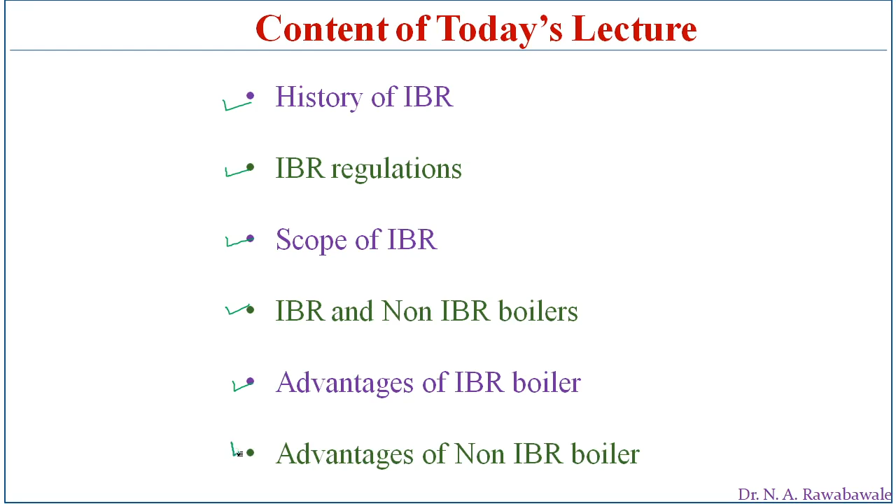So initially there was a boiler explosion that occurred in Calcutta in the year 1863, and that became the origin for IBR, the Indian Boiler Regulations. That created the necessity of boiler regulation, which compelled the governments in existence to develop a law regarding the boilers operating in industries.

The bill was passed by the Bengal Council in the year 1864 regarding inspection and installation of steam boilers in and around the city of Calcutta. The country decided to form a uniform set of regulations. Afterwards, the British government, which was ruling India, thought it necessary to form a set of regulations uniformly implemented throughout the nation, and they enacted the Indian Boiler Act 1923.

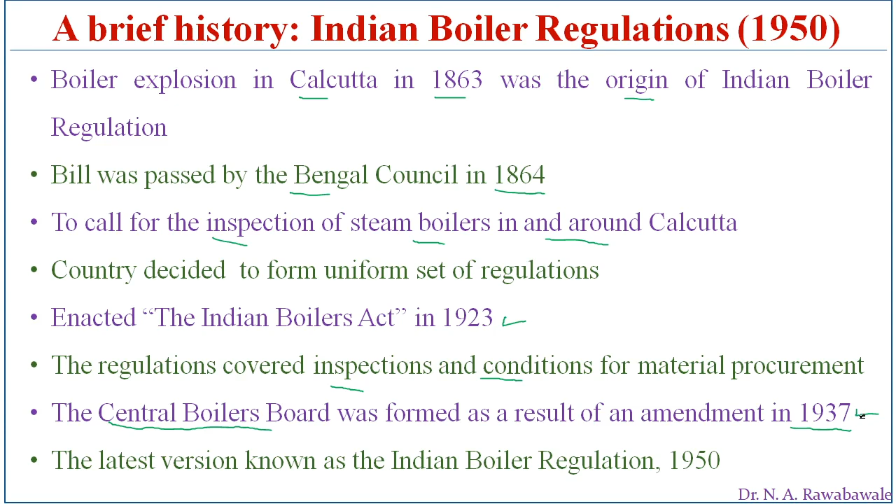So why is IBR, the Indian Boiler Regulation Act, necessary? To monitor manufacturing of boilers, as the boiler is subjected to very high pressure and temperature, and there is every chance that the boiler may explode if inferior quality material is used, if it is not maintained properly, or if its design is not proper. Then it may explode early and cause damage to property as well as the lives of people working around it. Therefore, it was necessary to monitor manufacturing of boilers.

Then selection of material is also one of the important factors responsible for explosion of a boiler. If the material used is of inferior quality, there is a chance of explosion. Therefore, it is necessary to monitor selection of material used for manufacturing of boilers.

At the same time, the design of the boiler, and not only the boiler but the components working at high pressure along with it, is also an important factor. If the design is poor, the boiler may not work properly and may cause damage or explode. Poorly designed components may not withstand high pressure and high temperature steam, and there is a chance of leakage or explosion.

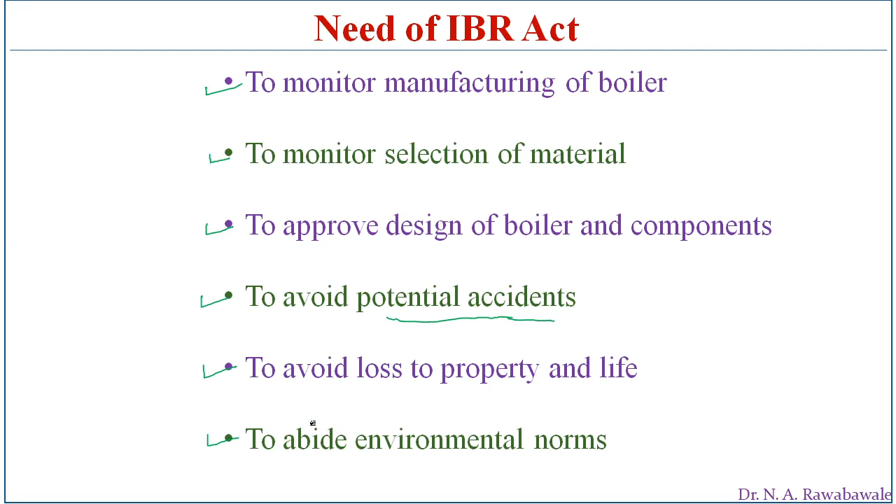IBR is also required to abide with environmental norms. So here the environmental norms: a boiler which is to be installed is going to create pollution and all. So properly designed boilers may produce less pollution, and for that also IBR was required.

IBR stands for Indian Boiler Regulations, or the Indian Boiler Act. It is the act enacted by the Government of India. The IBR Act governs manufacturing of boilers, installation of boilers, and operation of steam boilers.

So IBR is not type approval once a certain type of design is approved. For example, a boiler is designed and then it is approved once, so that can be continued without any alterations in the design. If there is an alteration, then a re-approval is required. So a minor alteration in the design of a boiler requires approval from IBR.

So it is a specific approval for each and every unit, meaning if we are using a boiler, manufacturing a boiler or installing a boiler, IBR has to approve each and every component such as the economizer, boiler valves, everything has to be approved. Each boiler, every valve, every trap, every pipe has to be approved by the IBR authorities.

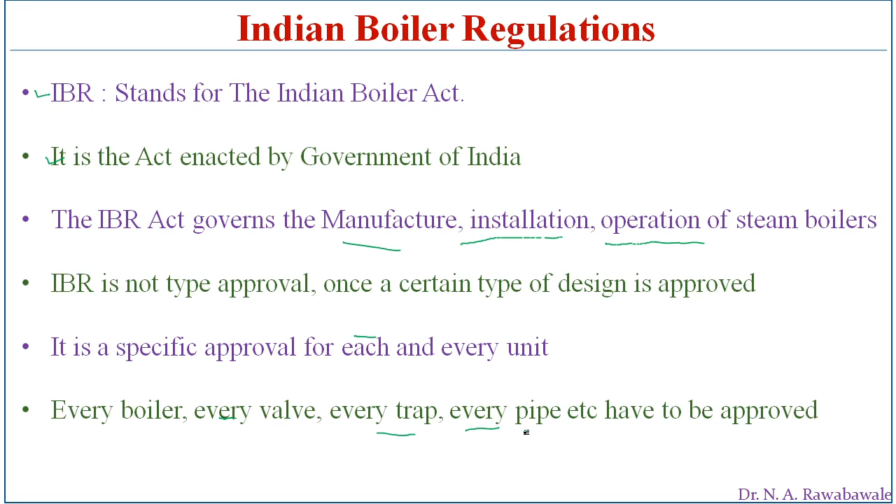So anything that is used without IBR approval is not valid, and there are actionable claims over such use of devices which are not approved by IBR. So the components which are working along with the boiler at high pressure and high temperature have to be approved by the proper authority.

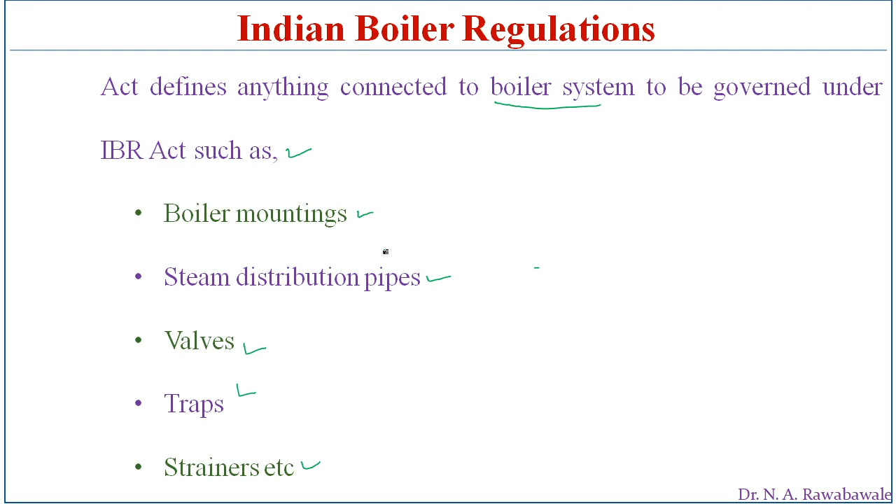So the Indian Boiler Regulation Act defines anything connected to the boiler system to be governed under the IBR Act, such as boiler mountings, steam distribution pipes, valves, traps, strainers. Boiler mountings and accessories have to be covered here, but not all accessories. Few of the accessories have to be covered.

IBR boiler means a closed vessel exceeding 25 liters capacity. It is used exclusively for generating steam under pressure. So the pressure which is generated is above 3.5 kg per centimeter square. If the pressure is above 3.5 kg per centimeter square, then that boiler is called an IBR boiler.

It includes boiler mountings and other fittings also. So an IBR boiler includes boiler mountings and other fittings such as valves and all, which are wholly or partly under pressure when steam is shut off. Even if steam generation is shut off, it has to withstand this pressure wholly or partly. Then that component is known as an IBR boiler.

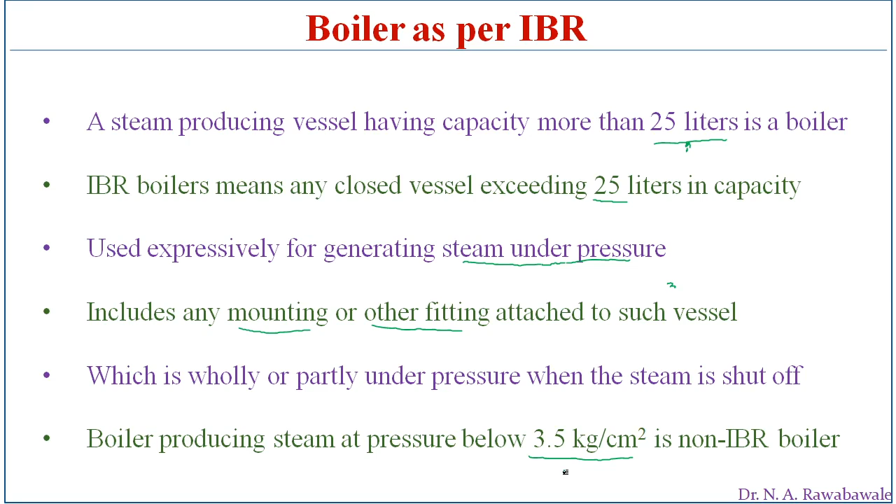The scope of IBR. What is covered under the IBR Act? IBR covers the design, fabrication, inspection, testing and certification of boilers, or any boiler part including feed piping, fittings or vessels attached. So this covers all the things which are in connection or working along with the boiler. The boiler part including feed pipe.

The water pipe which is supplying feed water to the boiler is known as feed piping. That piping is also considered under IBR because the feed water has to be supplied to the boiler at very high pressure, that is, at boiler pressure itself. Therefore that piping is also considered under IBR.

Fittings such as valves and all, vessel attachments, anything that is attached to the boiler shell, maybe a pressure gauge, that is also covered under IBR. Boiler components, any other components working along with the boiler or fitted over the boiler. Then steam piping, the pipe which is carrying steam starting from the steam stop valve to the final use of steam, that is also included in IBR.

Feed piping we have already discussed. Economizer is covered in this because the water which is supplied through the economizer enters into the boiler, which is at high pressure. That is, feed water is passed through the economizer in order to extract heat, and that feed water is to be supplied at very high pressure. Therefore the economizer is also covered under IBR.

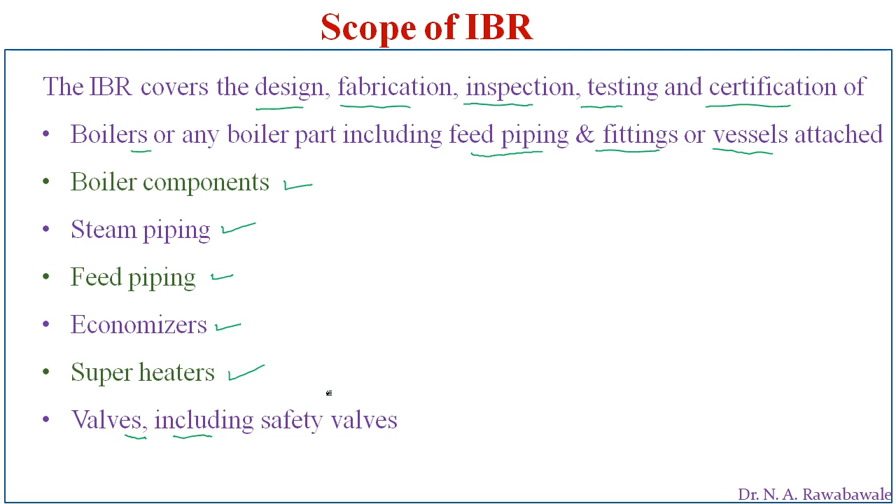Any mounting or fitting, or any external or internal part of the boiler which is subjected to pressure exceeding 3.5 kg per centimeter square gauge. This is a gauge pressure. If any component working along with the boiler is subjected to pressure more than 3.5 kg per centimeter square gauge, then that part is covered under IBR, for which proper certification through IBR authorities is required.

Steam receivers, separators, steam traps, accumulators, and similar vessels are covered. There can be heat exchangers, converters, evaporators, or similar vessels in which steam is generated. So anything where steam is generated is also covered under IBR. We cannot say that this is simply a heat exchanger, not a boiler, and not covered under IBR. If a heat exchanger is working at high pressure above 3.5 kg per centimeter square gauge pressure, that heat exchanger is also included in IBR.

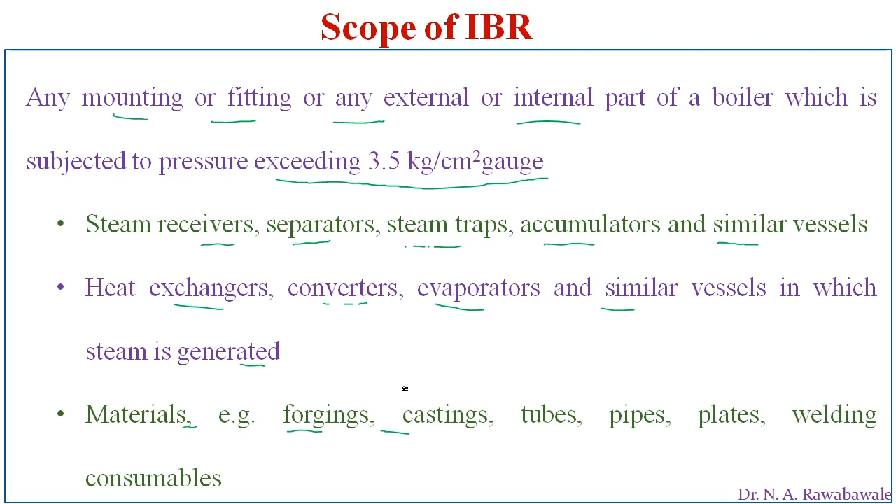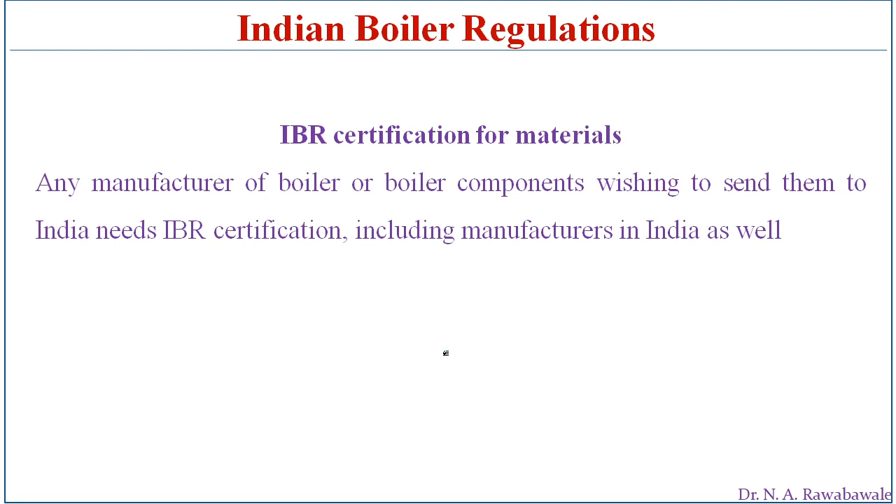Then materials: forgings, castings, tubes, pipes, plates, welding, and consumables which are used to manufacture the boiler are covered under IBR law. So what is IBR certification for material: any manufacturer who wants to manufacture a boiler or components of a boiler and wishes to send that material or components to India needs certification. Not only foreign manufacturers, it includes Indian manufacturers. So if any Indian manufacturer wants to manufacture boiler parts or a boiler, they also need to get IBR certification to manufacture such components and supply them into the market.

Inspecting authority: who has authority to inspect a boiler? Any agency recognized by the Central Boiler Board. The Central Boiler Board is established by the Government of India, and CBB recognizes a person or agency to do IBR inspection, and only that agency can do inspection or certification of a boiler. So only an agency recognized by CBB as IBR certifying authority has the authority to issue the certificate. Inspecting authorities are required to sign off on many parts of IBR certification processes.

These inspecting or certifying authorities are appointed or chosen by CBB, and they have to sign off on many parts of the IBR certification process. So they have to do inspection and then sign such certificates. They are heavily scrutinized by the Indian government. At the time of appointing such authorities, the Government of India verifies their qualification, and after examining them, appoints such authorities to inspect the boiler. Inspecting authorities are given certificates indicating their approval. Once an authority is approved, the Government of India issues them a certificate that such person or agency is authorized to certify boilers.

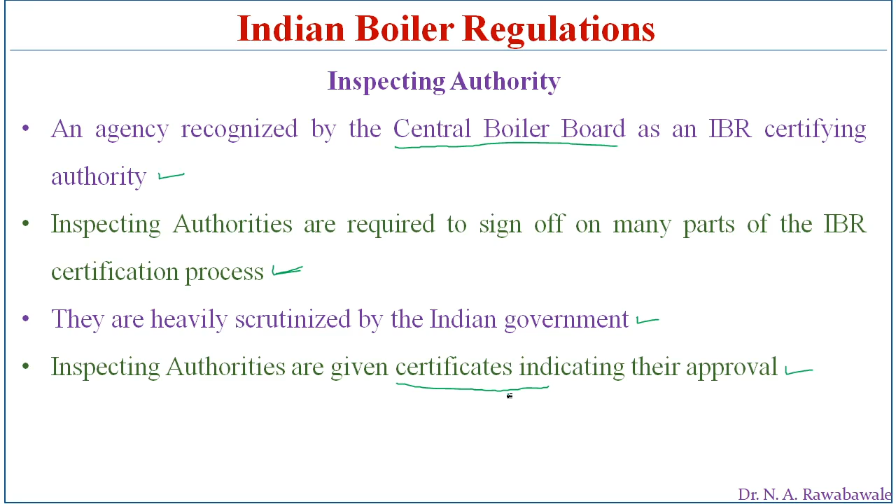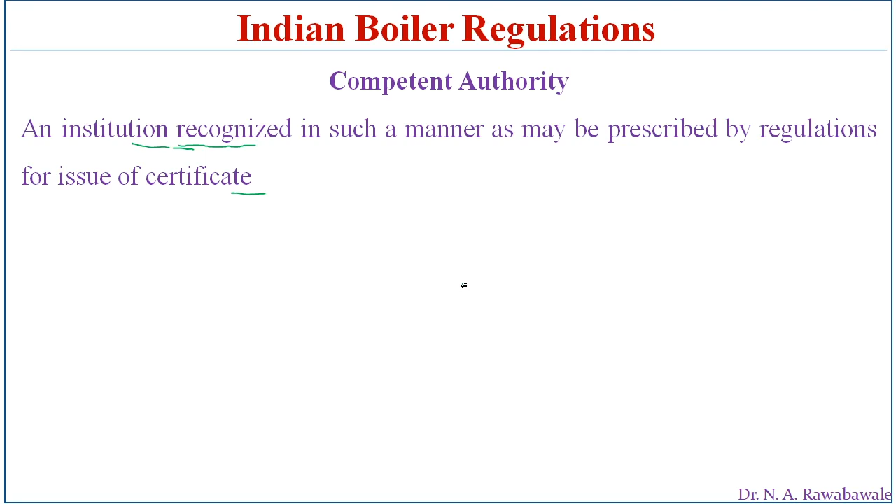Competent authority: an institution recognized. Who is the competent authority to give a certificate? Any institution or organization, in such manner as may be prescribed by regulations, for issue of certificates. It is specified in the regulations whom they can authorize as per the law specified in the act. The certificate issuing authority is appointed.

Every item used in a boiler system has to be manufactured, tested, installed, operated and maintained under supervision of the local boiler inspector. So when you want to manufacture, test, install, operate, or do maintenance of a boiler, that is to be done under supervision of the local boiler inspector.

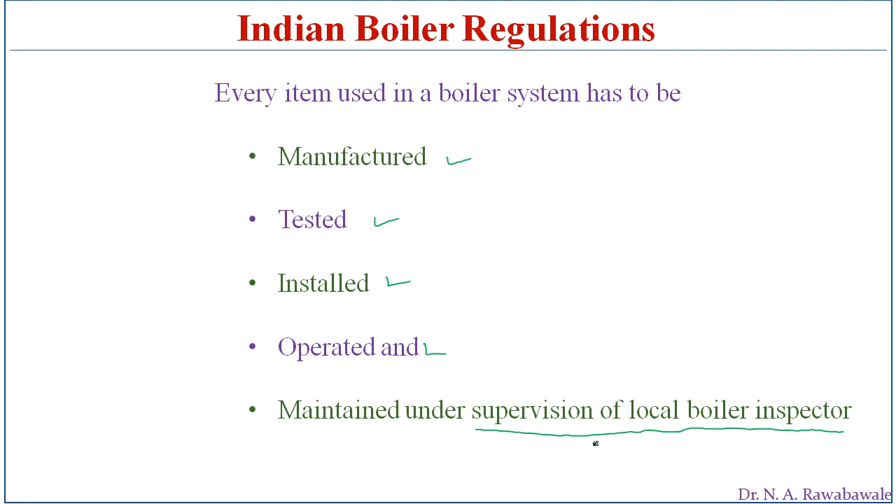So boiler inspectors are appointed. Those boiler inspectors play a very important role in manufacturing, testing and installation as well as operation and maintenance of boilers. These inspectors have to certify the boilers even after installation. Every year boiler inspection has to be made, and that is through the local boiler inspector.

Advantages of IBR boiler. What are the advantages of IBR boiler? If a boiler you have installed is under the certification of IBR, then there is no risk of explosion because it is thoroughly inspected and only then certified as an IBR boiler. It follows the norms of IBR and is manufactured from IBR materials. Therefore, there is no risk of explosion.

That means those boilers are verified under the IBR Act, and only when they fulfill all requirements of IBR are they certified. Therefore, there is very less risk of explosion and there is legal compliance. Ensures peace of mind. If you install a boiler certified by IBR, there will not be any threat that somebody will come and raid your industry for using a non-IBR boiler. And even if any accident occurs, you will not be held as responsible as if you had installed a non-IBR boiler.

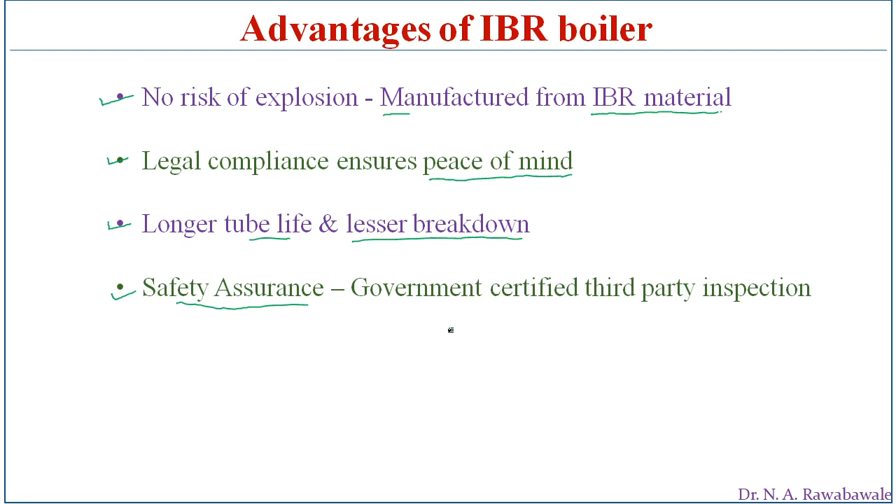Longer tube life and lesser breakdown. If you are using a standard IBR boiler, the life of tubes is longer and the boiler will very rarely have a breakdown or stop working. Therefore, continuous working of the boiler can be assured. There is safety assurance: government certified third party inspection. The boiler is inspected by a third party and only then certified, which is an assurance of the safety of a boiler. These are the advantages of using an IBR boiler.

So now, what are the advantages of using a non-IBR boiler? Only if the working pressure is below 3.5 kg per centimeter square do we go for a non-IBR boiler. Such boilers are outside the purview of IBR and not covered by the IBR Act. Therefore, you need not go through the lengthy process of boiler certification and inspection. No registration of the boiler is required at the site. If it is an IBR boiler, it must be certified at the site at or after installation.

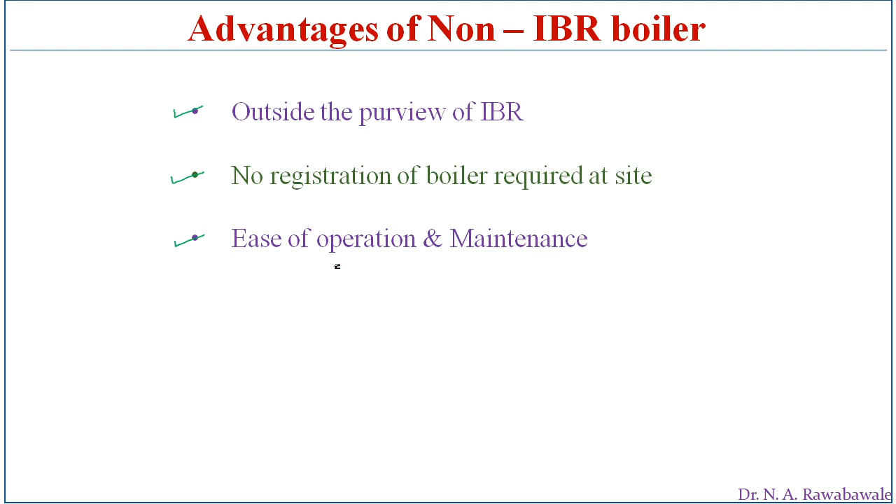Ease of operation and maintenance. A non-IBR boiler is a very simple and ordinary boiler producing steam at pressure less than 3.5 kg per centimeter square. Therefore, the working as well as maintenance of that boiler is simple and easy.

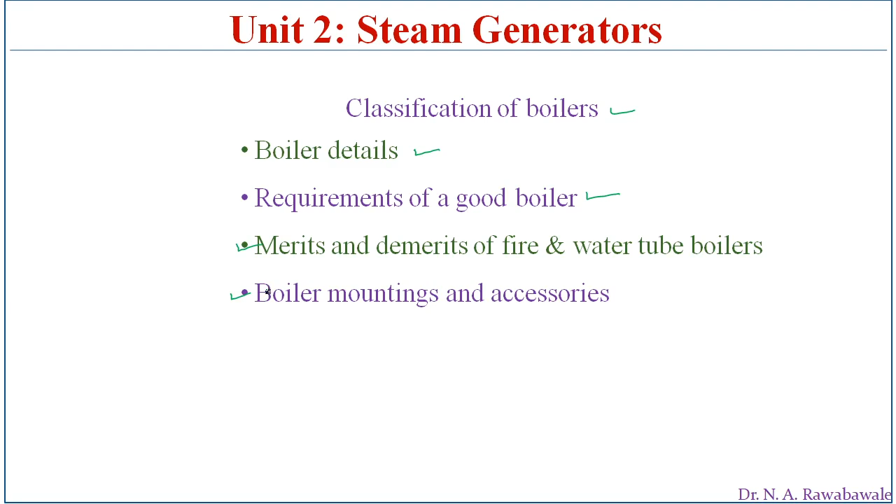So with this, I have covered unit number 2, steam generators, wherein we have studied classification of boilers, boiler details, requirements of a good boiler, merits and demerits of fire tube and water tube boilers, then boiler mountings such as valves, pressure gauge, water level indicator, manhole, and boiler accessories such as economizer, air preheater, superheater. Then we studied boiler draught, its classification, natural draught, efficiency of chimney, draught losses and types of boiler draught.

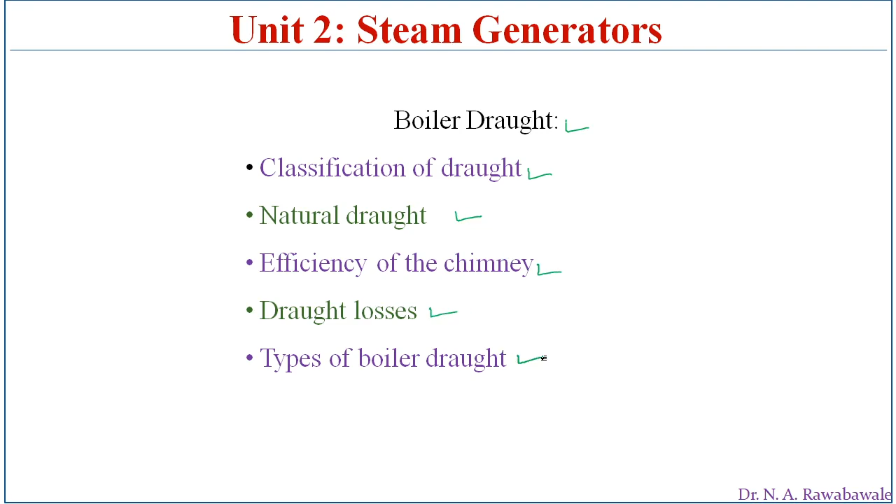Then we covered evaporation, equivalent evaporation, boiler efficiency, boiler trial and heat balancing, and today we discussed IBR also. So at this stage, I have covered everything specified under Unit 2, steam generators. I hope you have followed unit number 2.